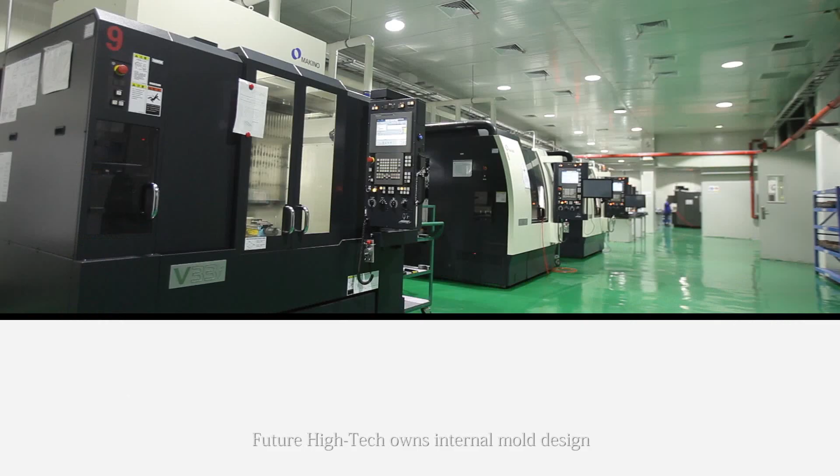Shanghai Future High-Tech Company Limited is the pioneer group in China, the leading professional metal injection molding (MIM) manufacturer in the world. Future High-Tech owns an internal mold design, development, and fabrication workshop with world-class advanced manufacturing equipment. With various intellectual patents of MIM and CIM technology and BASF catalyst technology from Germany, Future High-Tech is the leading MIM manufacturer in China.

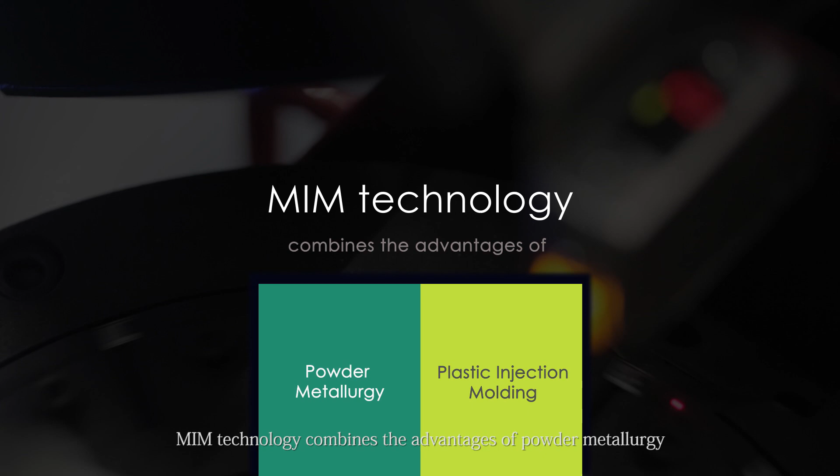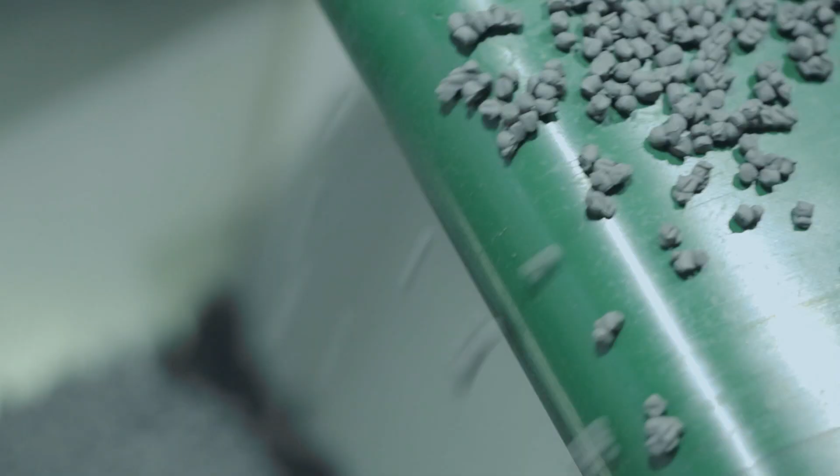MIM technology combines the advantages of powder metallurgy and plastic injection molding technologies. The first step of production is feedstock preparation by mixing the material of metal powder and binder. Then inject the feedstock into the injection molding machine to form a green part.

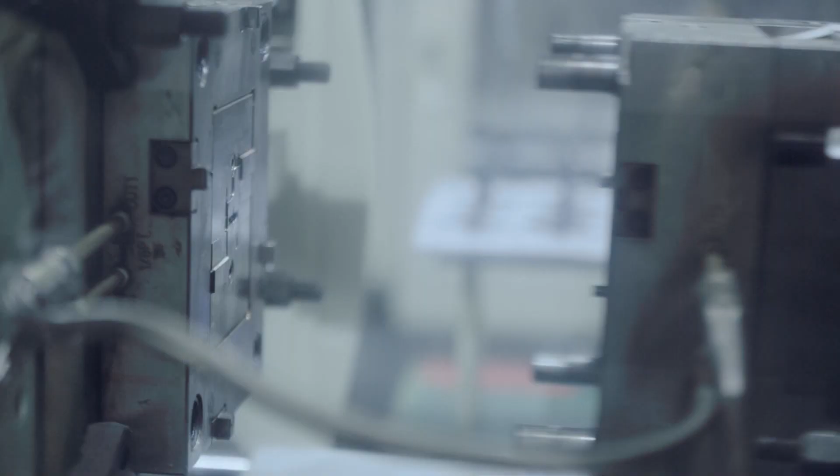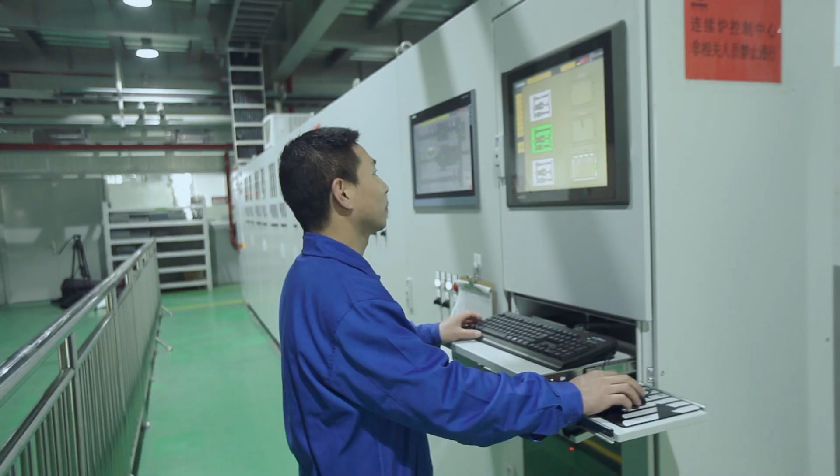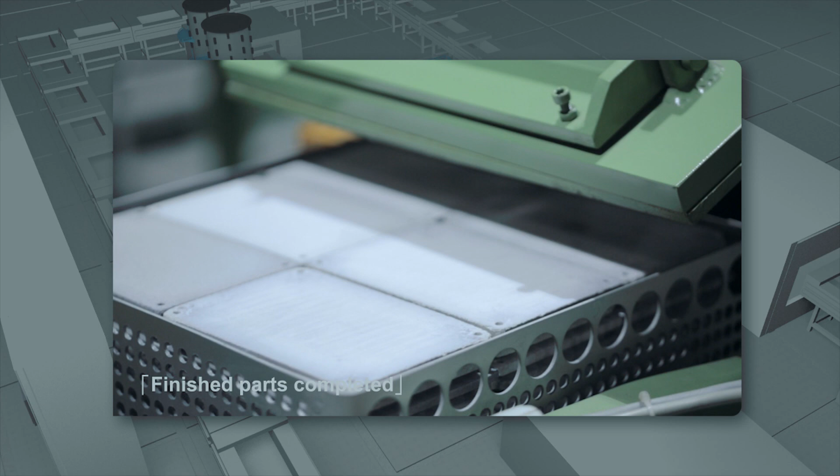Following that, debinding and sintering are processed through continuous furnace operation, so as to evaporate the binder in the part and condense the metal element under high temperature. Then the parts are finished. After a series of post-processing operations and testing, the entire process is complete.

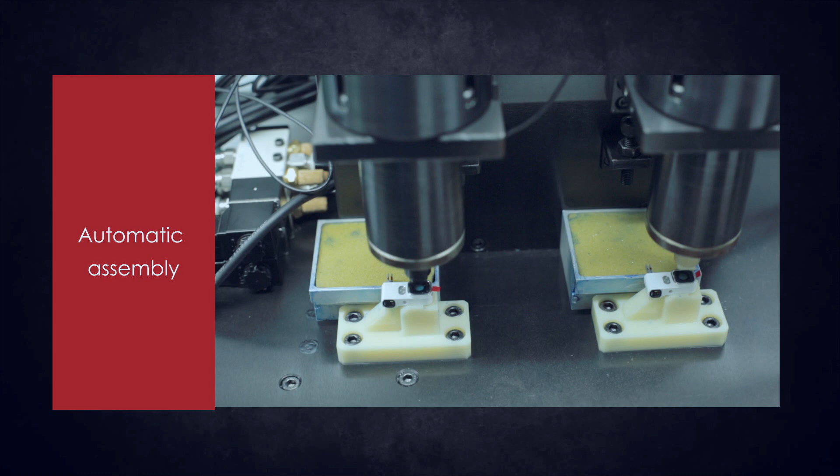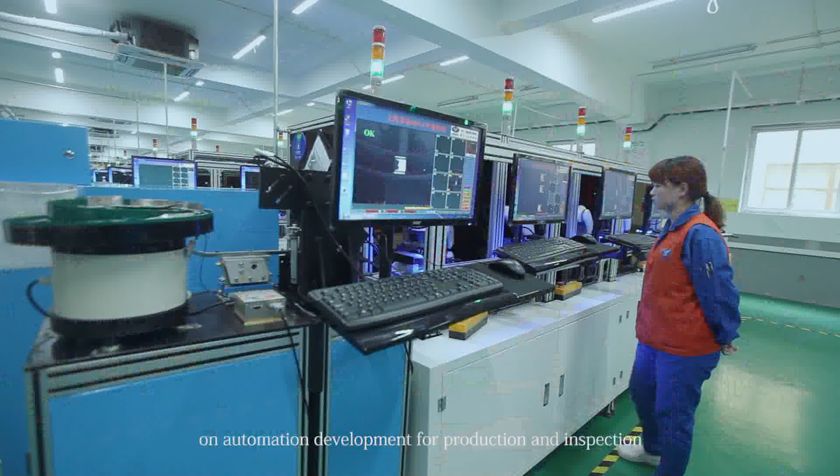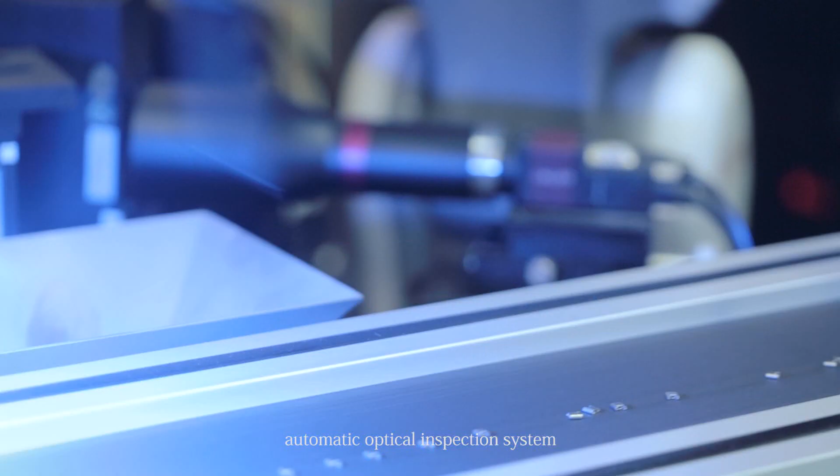Future High-Tech has strong ability in automation development for production and inspection, such as fabrication by robotic arm, vision probe inspection, automatic optical inspection system, and CMM dimensional inspection. For quality control, various reliability tests are done internally to support the customers.

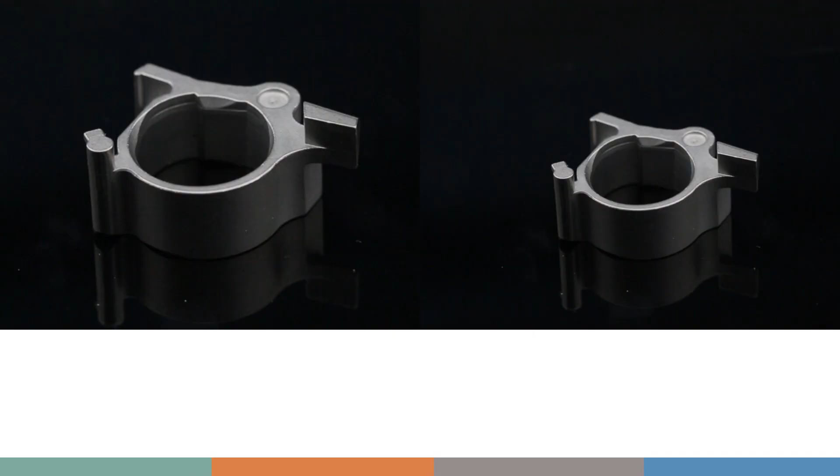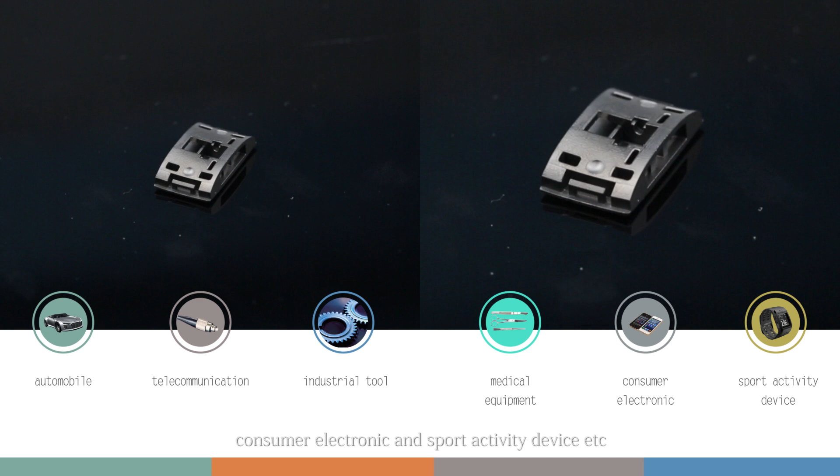MIM technology has been widely applied to various fields such as automobile, telecommunication, industrial tool, medical equipment, consumer electronics, and sport activity devices, etc. Future High-Tech provides complex components with premium quality and competitive cost solutions, offering a win-win strategy to the world.